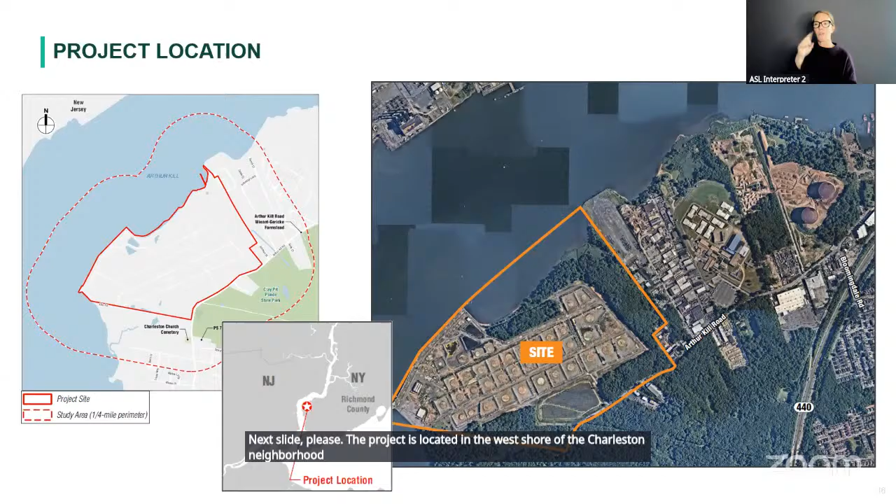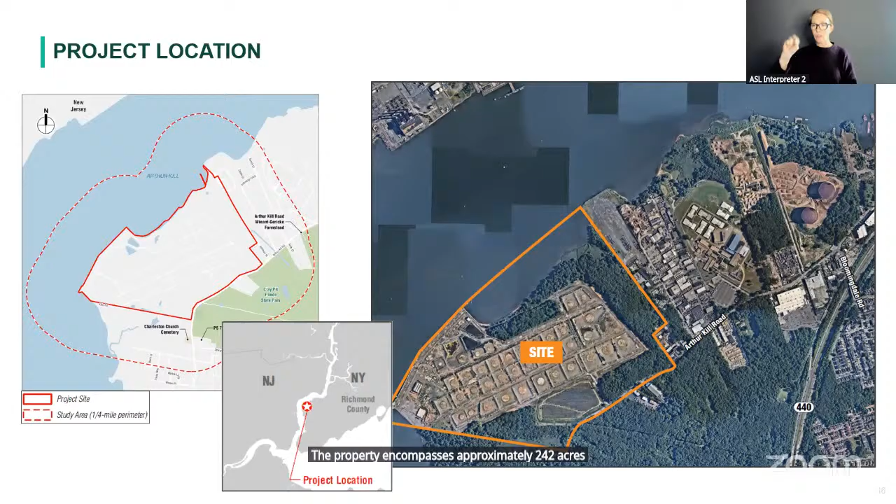The project is located on the west shore of the Charleston neighborhood in Staten Island Community District 3, along Arthur Kill Road near the intersection of Johnson Street, and along the Arthur Kill tidal strait. The property encompasses approximately 242 acres and contains the vacant Port Mobil Oil Storage Facility, which was permitted as a major oil storage facility with 38 above-ground tanks.

The facility was active between 1930 and 2019, when it ceased operations. It included 13 small buildings to aid operations, as well as a small parking lot accommodating approximately 40 spaces. A waterfront portion of the property contains a functioning dock with limited existing operations and a bulkhead measuring 2,100 feet. The property also contains a ground-mounted solar array providing energy generation for off-site users, installed in 2016. A single roadway, Ellis Road, currently provides access to the site along the southern end of the property.

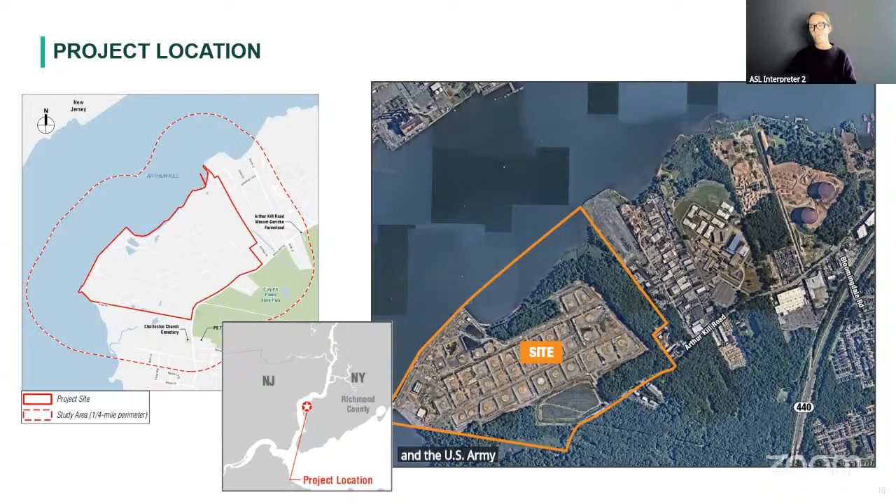Approximately 121 acres of the property consists of undeveloped woodlands and natural shoreline, including approximately 19 acres of tidal and freshwater wetlands under the jurisdiction of the New York State Department of Environmental Conservation, also known as DEC, and the U.S. Army Corps of Engineers. These undeveloped areas are concentrated along the perimeter of the property, and it is estimated the property contains between 11,000 and 12,000 trees.

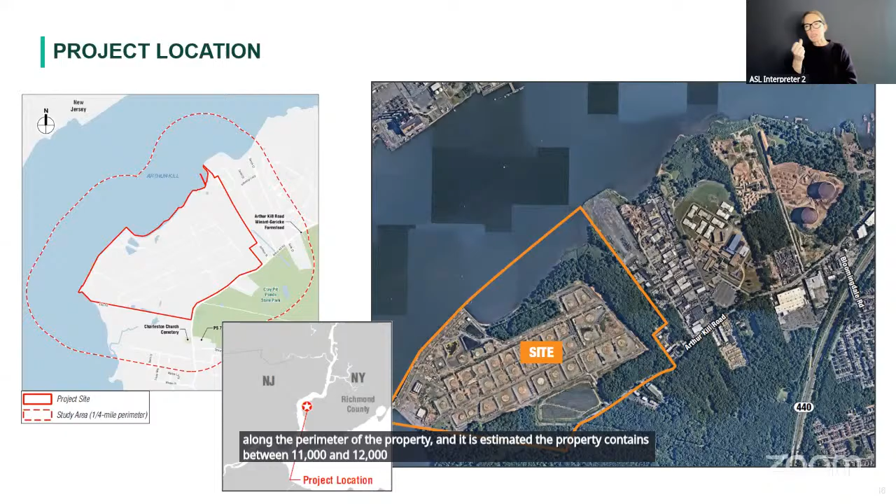The site is currently zoned M3-1 and is located in the Special South Richmond Development District. It is also located in the Rossville Industrial Business Zone. Since the facility's closure in 2019, 10 of the existing buildings on the property have been demolished, and the 38 above-ground oil tanks have been removed.

Between 2009 and the closure of the facility, the property has been subject to consent orders with the Environmental Protection Agency and DEC that require environmental remediation efforts. Those efforts are currently underway.

The image in the upper right-hand corner from 2021 shows the above-ground storage tanks prior to removal as part of the first phase of remediation. It also shows some smaller structures prior to demolition. The lower image from earlier this year shows the property following the removal of tanks, with 3 of the waterfront buildings remaining. Those buildings will be preserved to be used as part of the improved dock operations.

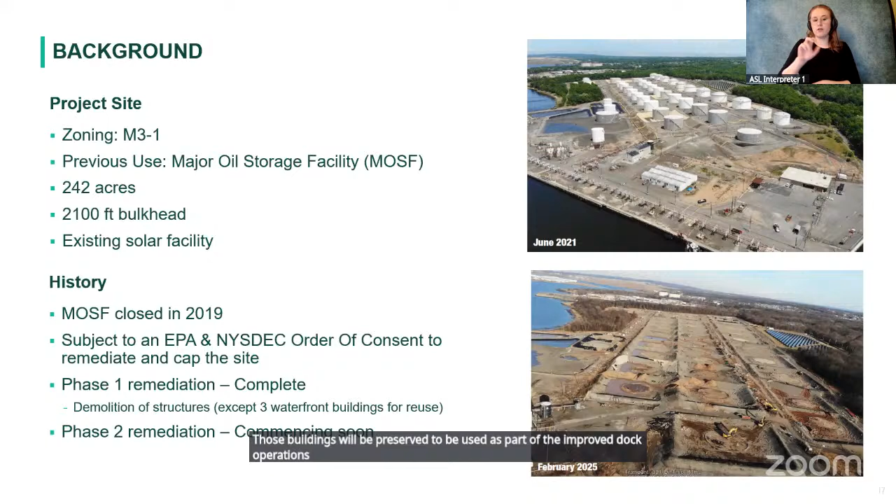The applicant intends to construct 3 one-story, 50-foot tall commercial warehouse buildings totaling approximately 1.4 million zoning square feet to be utilized as a logistics facility.

Approximately 30 acres along the waterfront would be used as supporting open industrial space for the dock and associated outdoor storage uses. An additional 20 acres would be utilized as industrial open space, which potentially could be utilized separately from the dock operations.

2 logistics buildings would front Arthur Kill Road, each containing approximately 215,000 square feet. A third logistics facility building would contain approximately 1 million square feet, located in the center of the property. These buildings would be accessible from a new private roadway from Arthur Kill Road that would provide access to 1,185 parking spaces, 276 loading berths, and 7 acres of storage space for trailers.

Approximately 5,800 square feet of open space would be allocated near the warehouses as open space for employees. To minimize disturbance to the natural areas of the site, including the wetlands, new development is primarily proposed within the footprint of the former oil storage facility, and the existing ground-mounted solar array would be relocated to the rooftops of the proposed new buildings and potentially expanded to increase energy production.

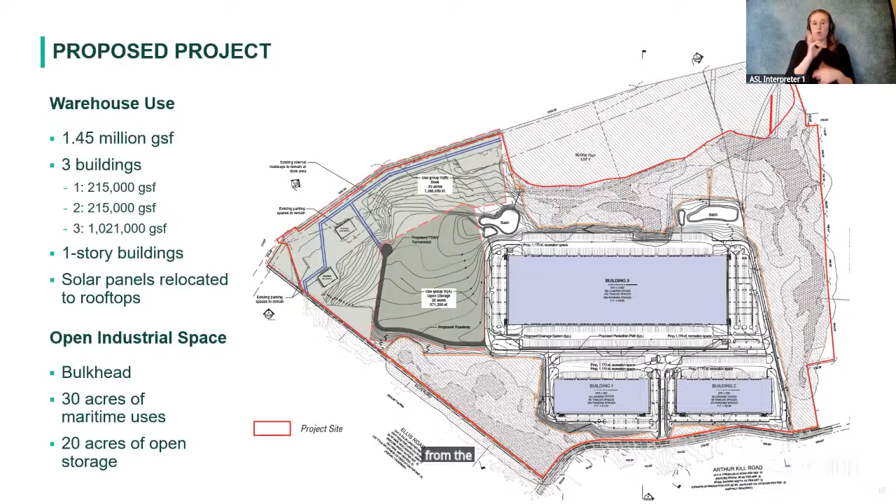The proposal seeks 3 actions from the City Planning Commission. The first action is a zoning authorization to modify natural features in the Special South Richmond Development District pursuant to Section 107-61 of the zoning resolution. This enables the modification of topography and the removal of trees, contrary to the rules of the special district under Section 107-312.

The second action is a zoning authorization pursuant to Section 107-472, which would enable a new parking facility in the development. Currently, properties larger than an acre are unable to provide new parking facilities in the special district as of right, and this action will waive that requirement to provide 1,185 parking spaces, which are required by the proposed uses.

A third action is a zoning certification pursuant to Section 36-58 to waive a requirement for cross-access connections in Staten Island. This action is sought as cross-access connections to adjacent zoning lots are not feasible here, given the presence of wetlands.

In addition to required zoning actions sought from the City Planning Commission, a Part 360 permit is sought from DEC for the importation of fill material. This fill area will be located on site and away from the waterfront area.

In addition, a joint permit is sought from DEC and the Army Corps of Engineers for wetland and wetland adjacent areas to install the new stormwater management system. At this time, those agencies are being consulted as part of the overall project. And now, Corey will present the scope of work for the environmental impact assessment.

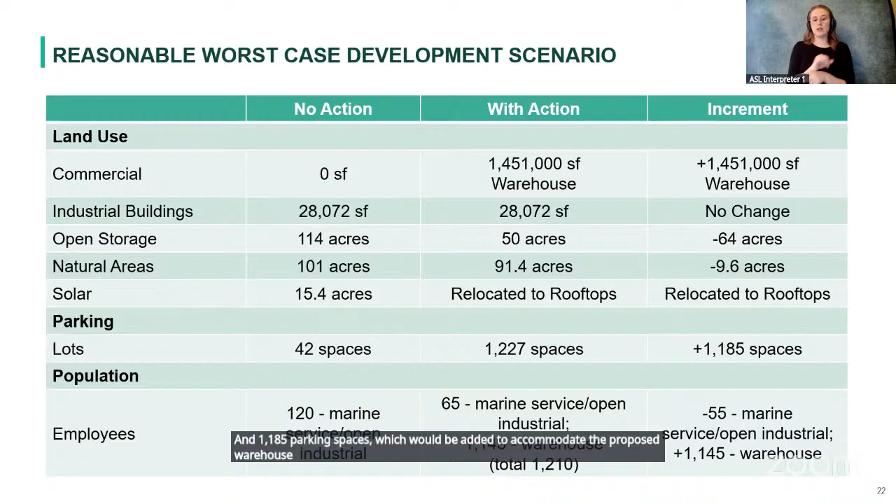There would be an additional 1,145 employees and 1,185 parking spaces, which would be added to accommodate the proposed warehouse and industrial open space.

The analysis will account for predicted changes in background conditions and then consider how the project would affect those future conditions. The one exception here is construction, which considers impacts that occur during the construction period prior to the completion of the project. The DEIS is also required to consider alternatives to the proposed project.

So we'll consider a range of reasonable development options or alternatives, and whether those alternatives could avoid or reduce project-related significant adverse impacts while still achieving the stated goals and objectives of the project.

It will also include a description of proposed mitigation measures, which are feasible and practicable measures that could be advanced to avoid or minimize significant adverse impacts that are identified in the draft EIS.

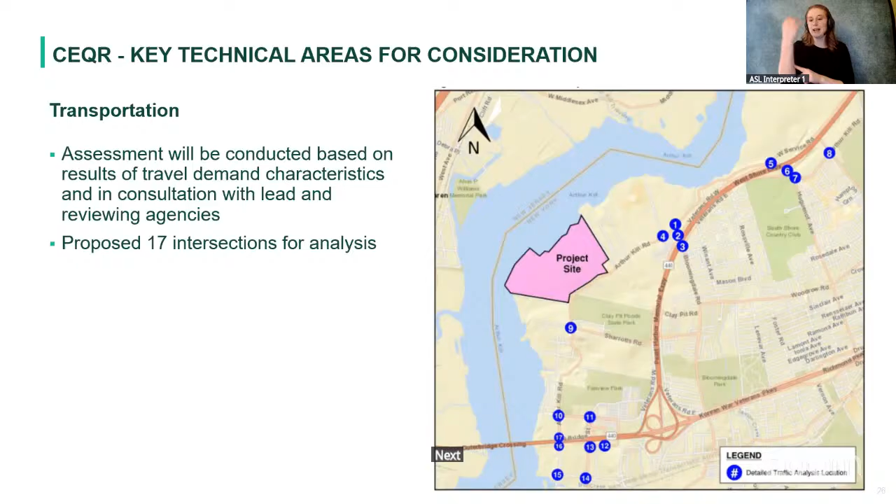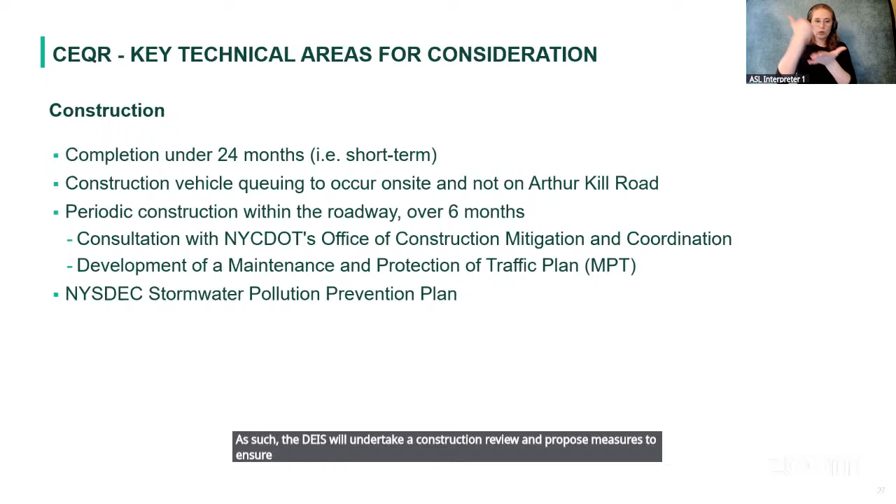While construction will be under 24 months, which is considered short-term in the CEQR technical manual, we understand that construction effects along Arthur Kill Road are a community concern. As such, the DEIS will undertake a construction review and propose measures to ensure construction mobilization, loading, and vehicle queuing will not occur on Arthur Kill Road, but rather on the project's site.

The analysis will review the periodic construction that will need to occur within the roadway, which will be coordinated through permitting with New York City DOT's Office of Construction Mitigation and Coordination, and with the development of a maintenance and protection of traffic plan. It will also review the stormwater pollution prevention plan to ensure no construction impacts.

And this concludes the applicant's presentation. Now back to Evran at DCP.

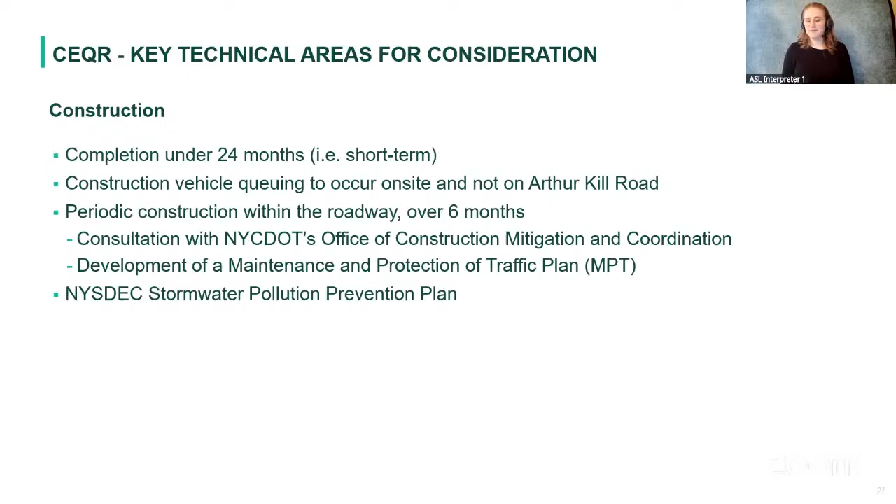So we will now move on to part 2 of the meeting. At this time, we will be receiving testimony from the elected officials, community board leaders, and government agencies.

When it's your turn to speak, your name will be called and you will be promoted to panelist. This will allow you to unmute yourself and give you the ability to turn your camera on if you wish to do so. There will be a short period where it will appear that you are no longer in the meeting, but you should be joining as a panelist shortly.

If speakers experience any technical issues that prevent them from sharing their testimony, we will pause, then move on to the next speaker to allow for troubleshooting to happen in the background. And we will call your name again at a later time.